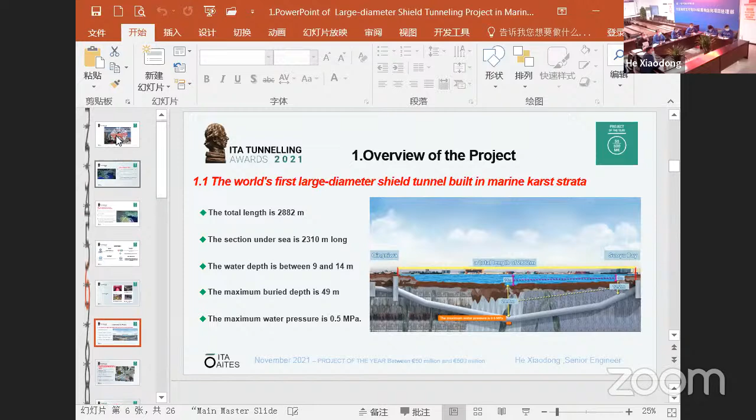I do not have the slides on screen. We cannot see your screen. Done. No, that's better, yes, I can see it now. Could you start again? Okay, I'll start again. Can you put it in full screen, please? Can you see our slide now? Yeah, let's go like this.

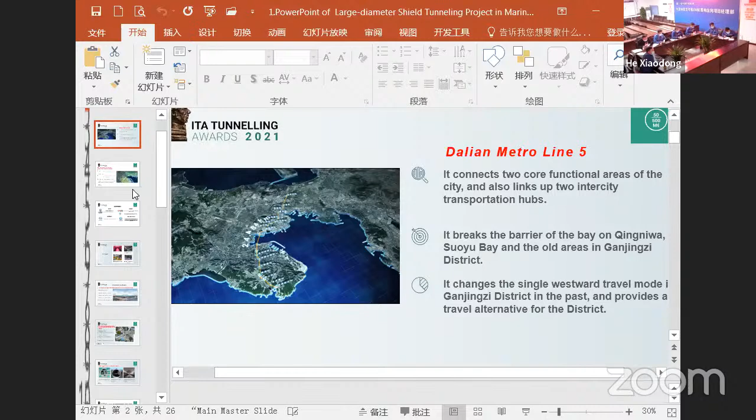Our project is the largest diameter shield tunneling project in karst strata of sea area. The project is located in Dalian, Liaoning Province, China. It is the control project of Dalian Metro Line 5, which breaks the traffic restrictions due to the bay and solves the problems of a single westward travel mode in Dalian City.

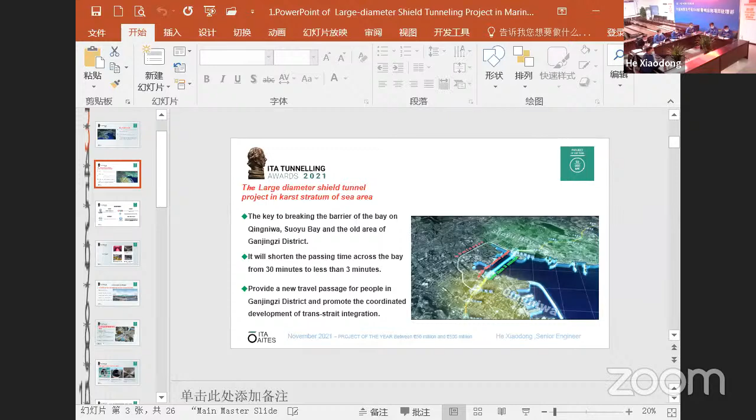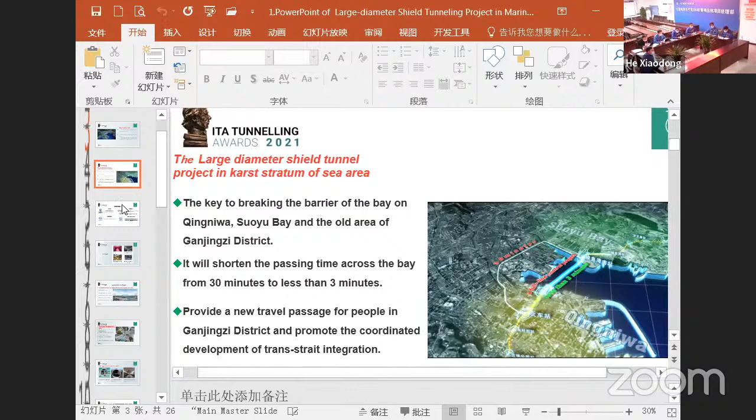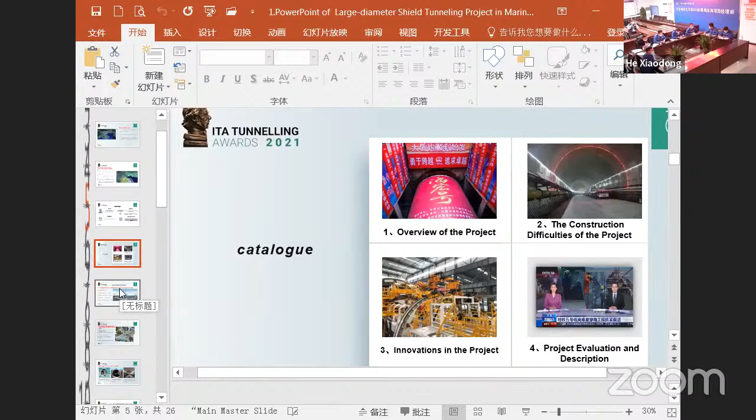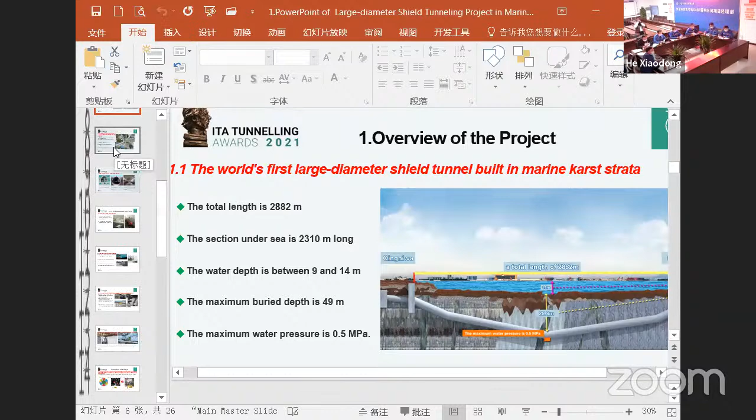We have done a lot of research on the design and development of shield tunneling machines, karst detection, treatment, and submarine excavation technology of large diameter shields. By now, we have come out with a number of innovations. The tunnel has a total length of 2882 meters and adopts a single hole, double line, double layer lining structure. It is the largest undersea subway tunnel in China.

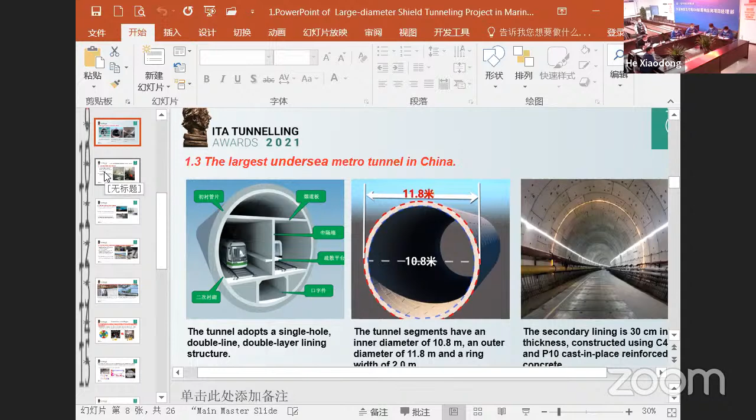The tunnel segments have an inner diameter of 10.8 meters, an outer diameter of 11.8 meters, and a ring width of 2.0 meters. The secondary lining is 30 centimeters in thickness. The section under the sea is 2310 meters long. The water depth is between 9 and 14 meters. The maximum buried depth is 49 meters, and the maximum water pressure is 0.5 megapascals.

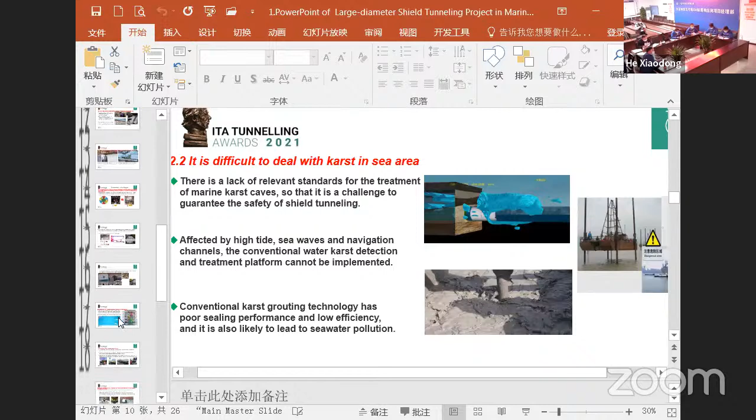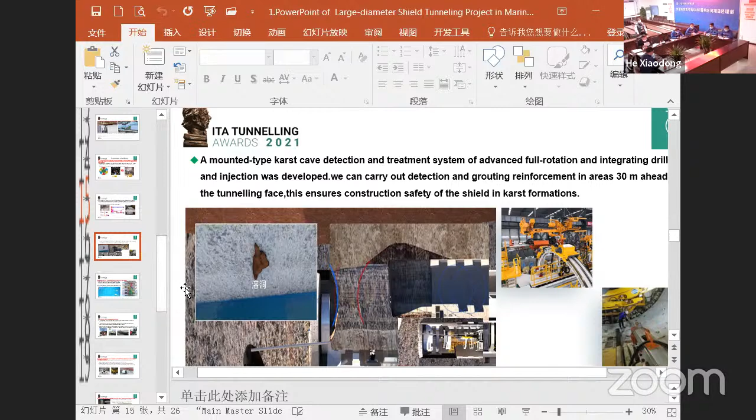The tunnel goes through a 1538-meter long, highly developed karst area with 3 major karst cave groups covering over 1,000 karst caves of various sizes, with a maximum cave height of 29.8 meters and the highest compressive strength of 118.2 megapascals.

We completed the following innovations in the project. First, we developed cutter heads for which the tool can be replaced under normal pressure for high water pressure karst formations.

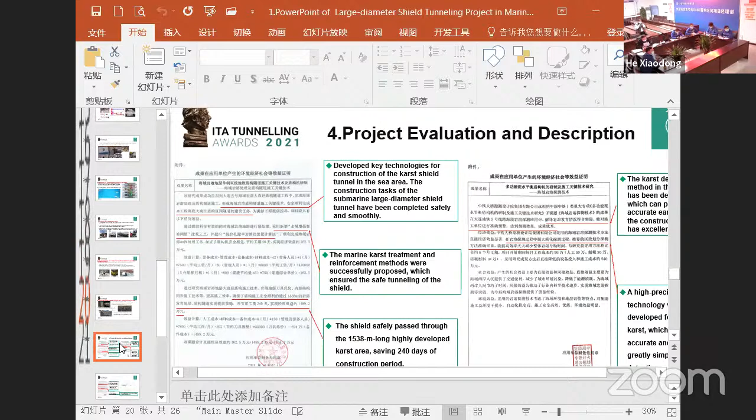The cutter heads can be inspected and replaced under normal pressure, which avoids the risk of tool replacement under high pressure and ensures the safety of life.

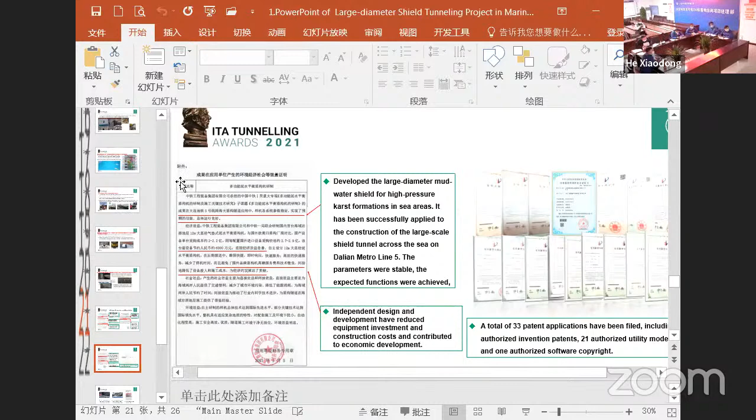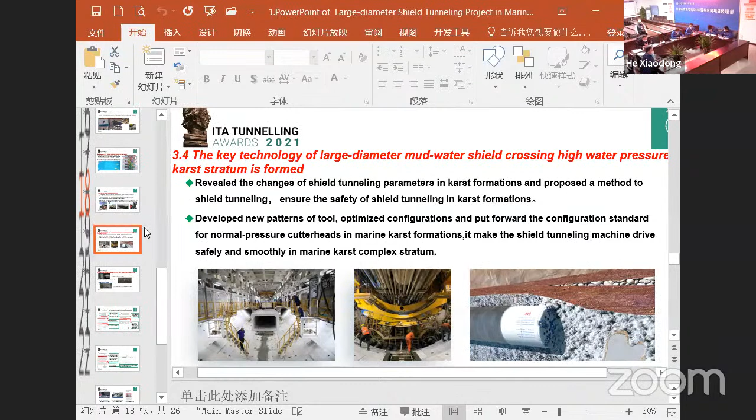A mounted type karst cave detection and treatment system of advanced full rotation, integrating drilling and injection, was developed. With this system, we can carry out detection and grouting reinforcement in areas 30 meters ahead of the tunneling face, ensuring construction safety of the shield in karst formations.

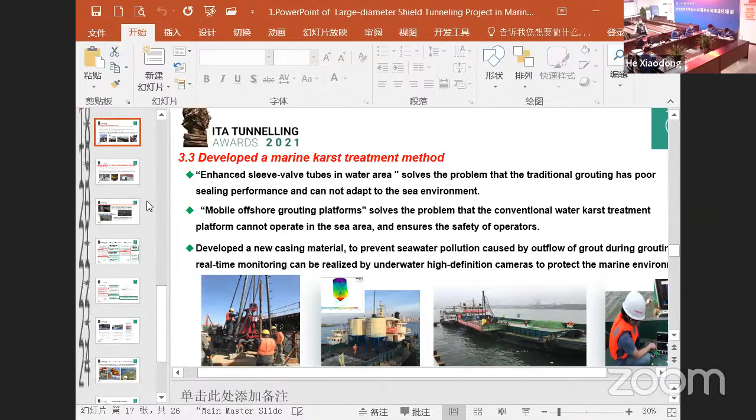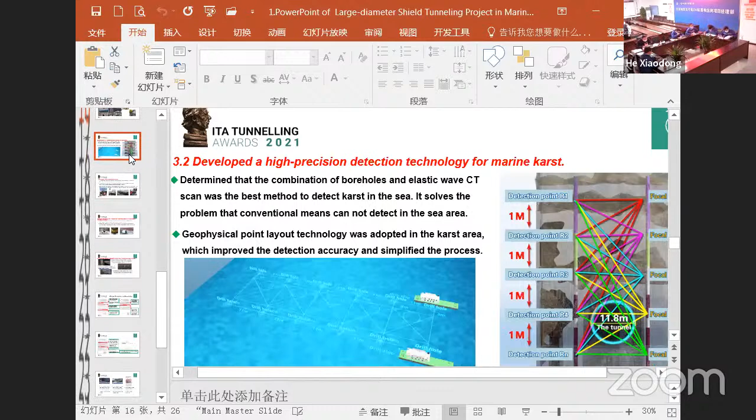Secondly, we determined that the combination of borehole and elastic wave CT scans was the best method to detect karst in the sea, which solves the problem that conventional exploration methods cannot be implemented in the sea area, and establishes the geophysical point layout technology in the karst area, which improves detection accuracy and simplifies the process.

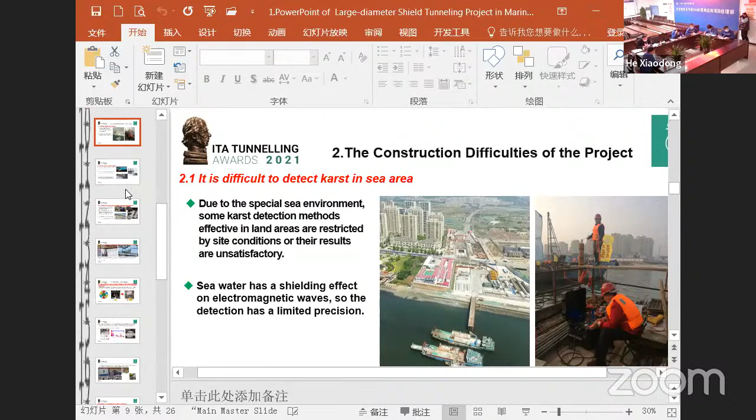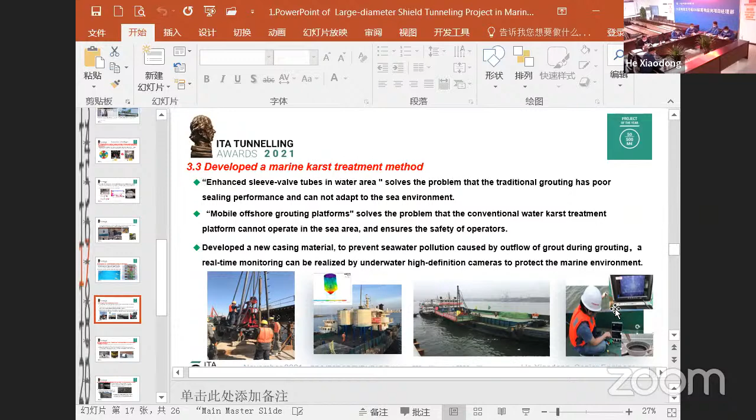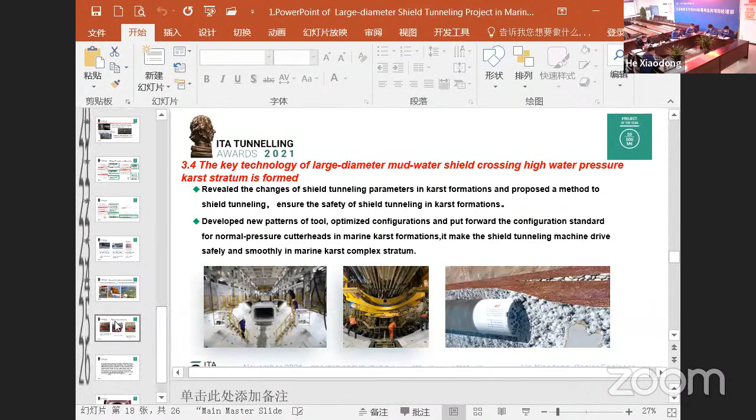Fourth, the key construction technology of large diameter mud water shield crossing the high water pressure karst stratum in the sea area is formed, which solves the various difficulties of large diameter shield tunneling in the karst stratum in the sea area, provides reference for shield crossing karst strata at home and abroad, and expands the stratum adaptation range of shield tunneling in the sea area.

Over the past 4 years, CCTV, People's Daily, Science and Technology Daily, Xinhua News Agency, China News Service, Liaoning Satellite TV, and other news media have reported more than 40 times that the project has conquered this worldwide difficult problem in super sea crossing construction, with news and documentaries fully affirming the construction achievements of the large diameter shield tunnel project in karst stratum in the sea.

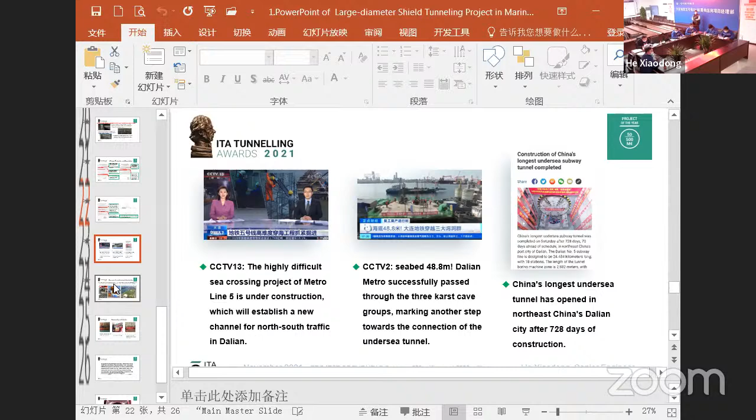The shield machine passed through 1538 meters of karst strong development area safely and smoothly, with no safety accidents occurring in the construction process. To protect the surrounding marine environment, a 5,000 square meter mud water site was established, which can screen and classify the slag excavated by the shield.

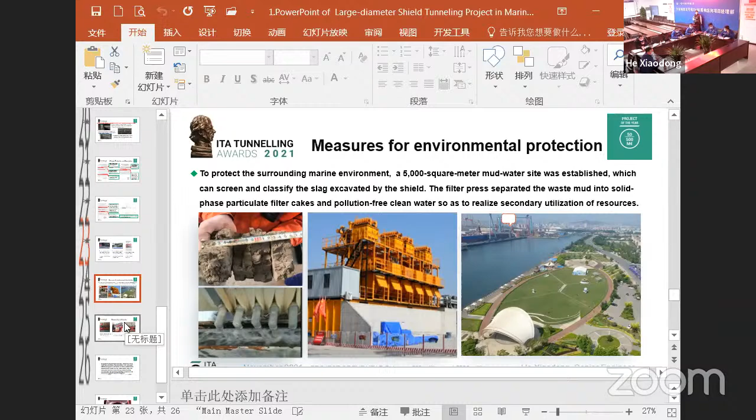The filter press separated the waste mud into solid phase particulate filter cake and pollution-free clean water, so as to realize secondary utilization of the resources.

Since the beginning of construction, the project site has been used as one of the venues for Dalian Nature's open day to citizens. We have established good social relationships through public visits, joint public welfare activities, and volunteer services. The project construction has won the support of residents of the surrounding communities, who speak highly of the super sea crossing project. Thank you for your attention.

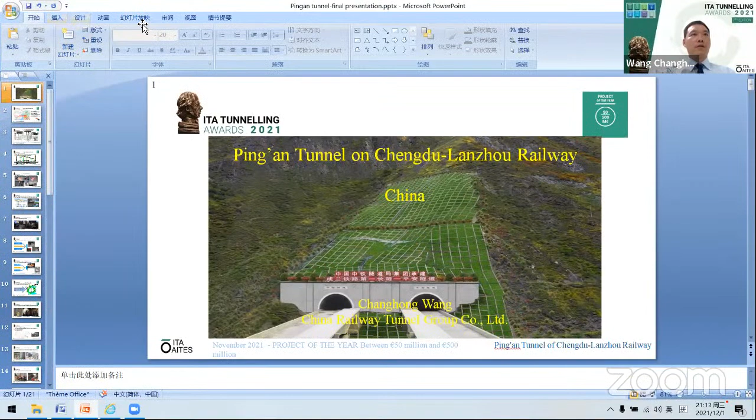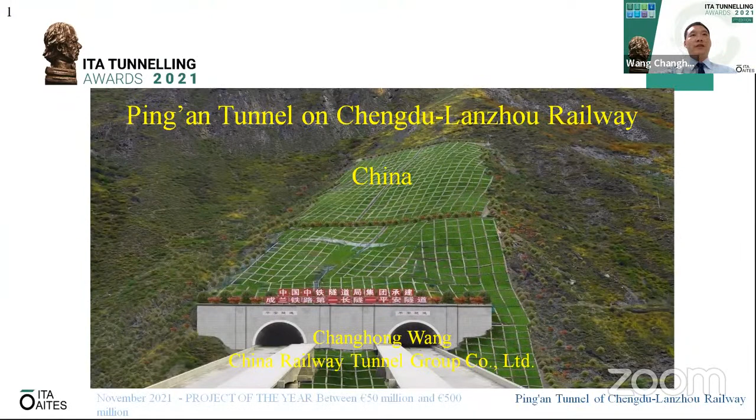Today, my presentation is on the Ping'an Tunnel on the Chengdu-Lanzhou Railway. The railway starts from Chengdu, Sichuan, and ends in Lanzhou, Gansu. The total length of the railway is 727 kilometers, with a design speed of 200 kilometers per hour.

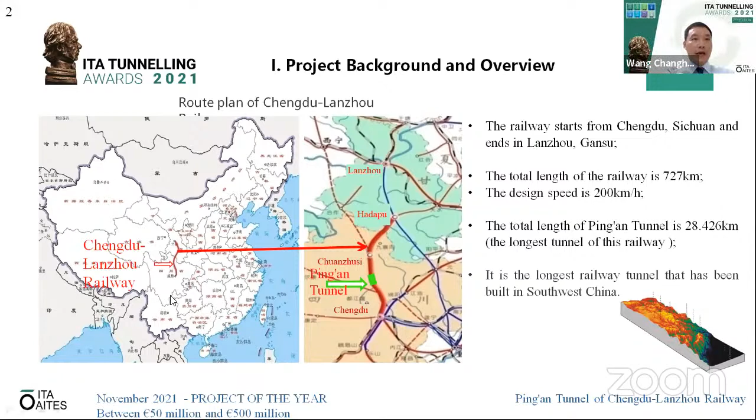The total length of Ping'an Tunnel is more than 28 kilometers. It is the longest railway tunnel that has been built in the southwest of China.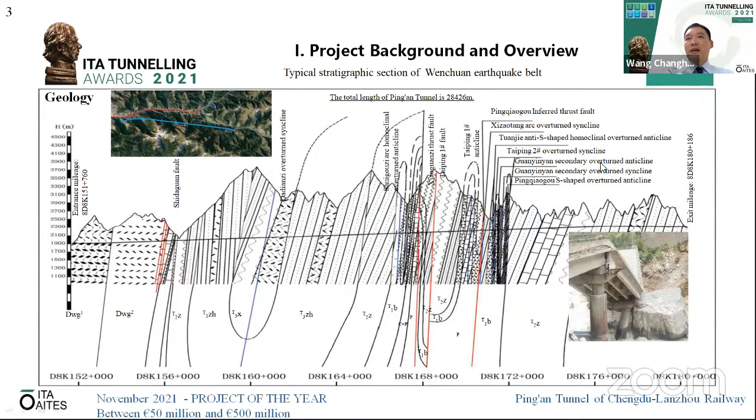Let's look at the longitudinal section of the geology. Ping'an Tunnel is located in the typical stratigraphic section of the Wenchuan earthquake belt. There are so many faults, synclines, and overturned anticlines. The geology is very complicated.

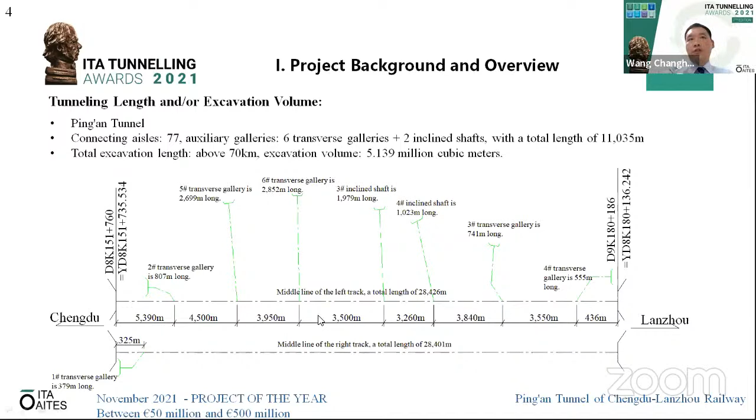For the purpose of accelerating the speed of construction, we built connecting aisles 77, 6 transverse galleries, and 2 inclined shafts. The total excavation length reaches more than 70 kilometers.

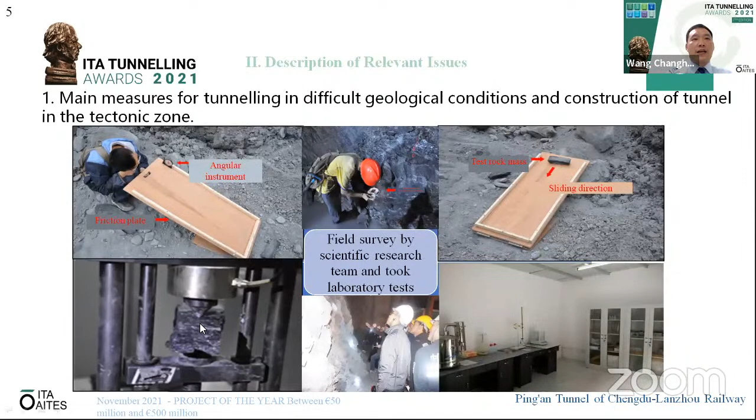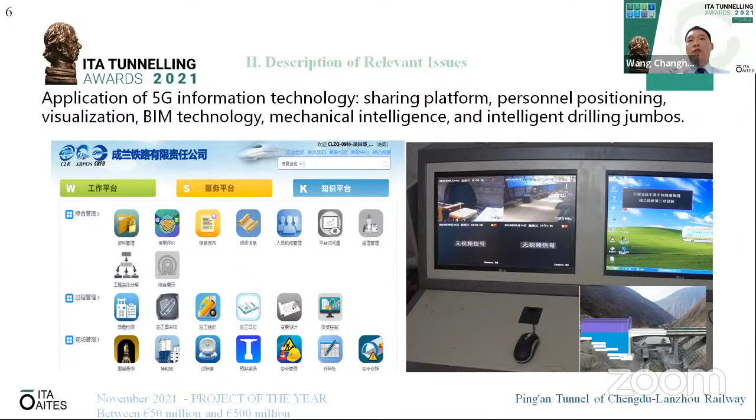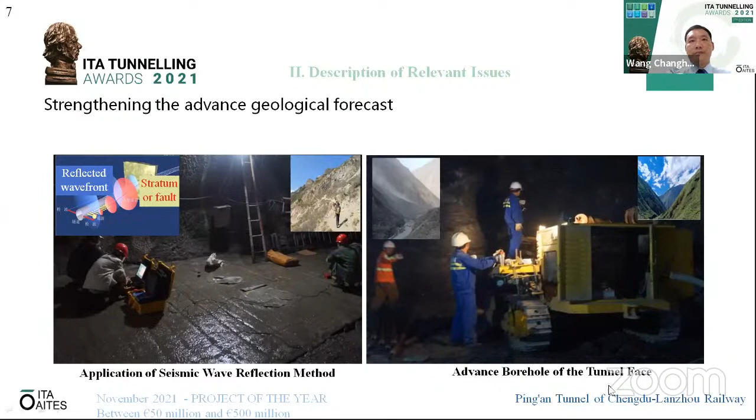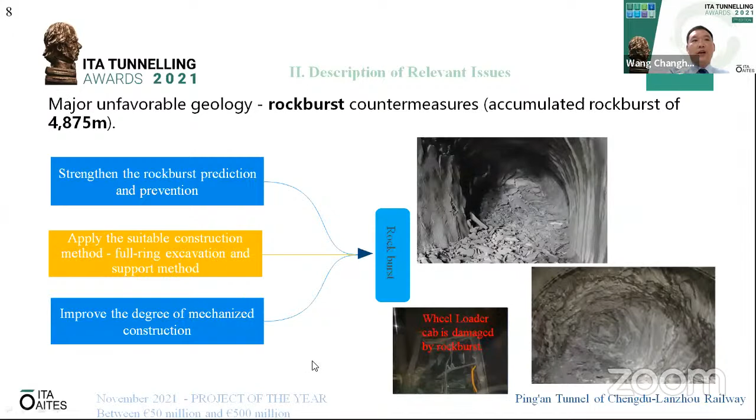There is major unfavorable geology, the rock burst, where the wheel loader cab is damaged. For countermeasures, we may strengthen the rock burst prediction and apply a suitable construction method, the full ring excavation, and improve the degree of mechanized construction.

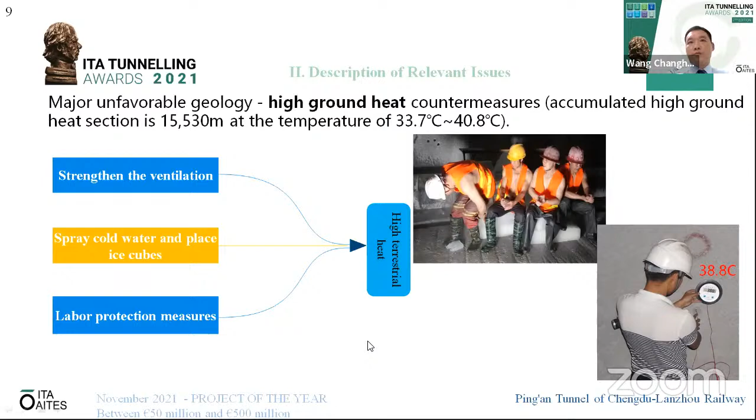There is another unfavorable geology, high ground heat. The countermeasures: we may strengthen the ventilation. For example, when the temperature reaches 38 degrees, we spray cold water and place ice cubes, along with other labor protection measures.

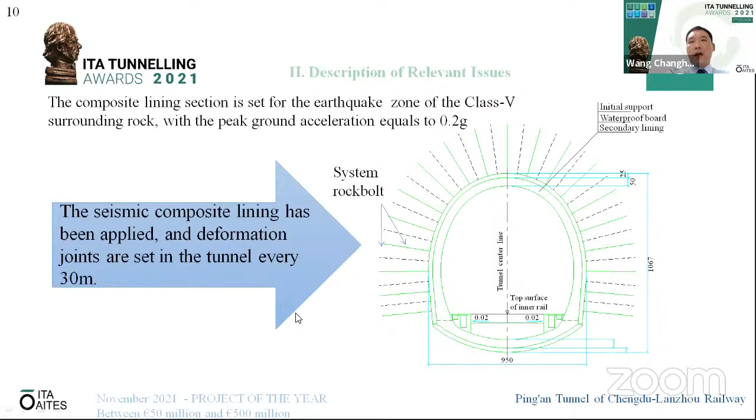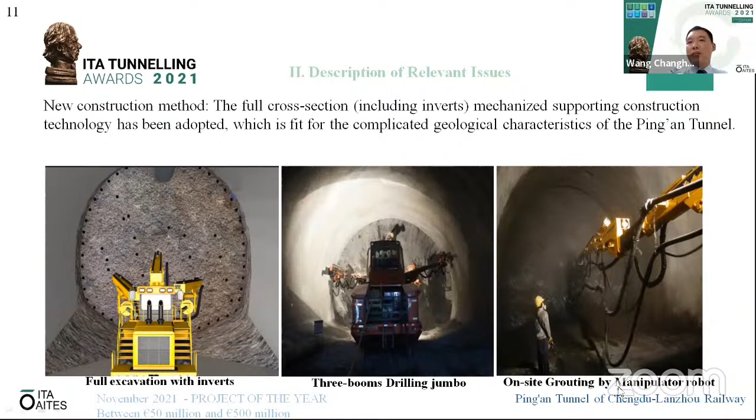The seismic composite lining has been adopted in the earthquake zone of class 5 surrounding rock. Deformation joints are set in the tunnel every 30 meters. The full cross-section inverts mechanized supporting construction technology has been used, for example the 3-boom drilling jumbo and on-site grouting by manipulator robots.

Based on this work, we obtained several patents for utility models and inventions, for example the rock bolting jumbo for shotcrete and rock bolt support.

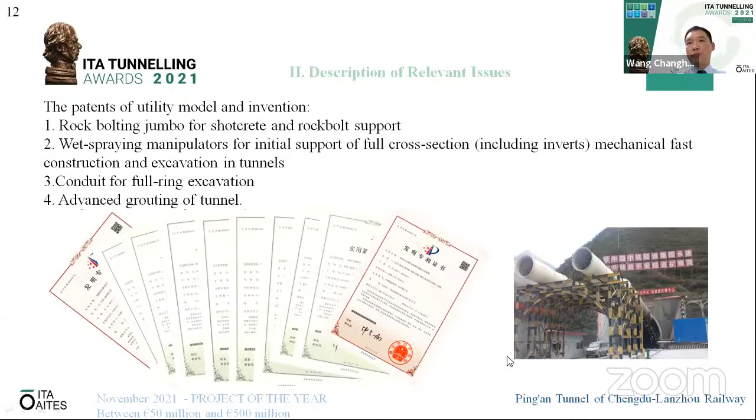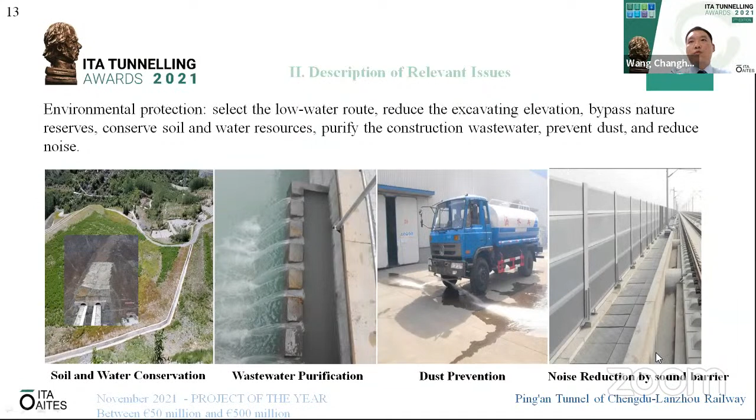For environmental protection, at first we selected the low water route, reduced the excavation elevation, bypassed the nature reserves, conserved soil and water resources, purified the water, prevented dust, and reduced noise with sound barriers.

Second, the logistic support for the construction of the super long tunnel. Emergency medicine and cold drinks in the tunnel were provided. The project emergency warehouse provides extinguishers, life belts, and emergency tools.

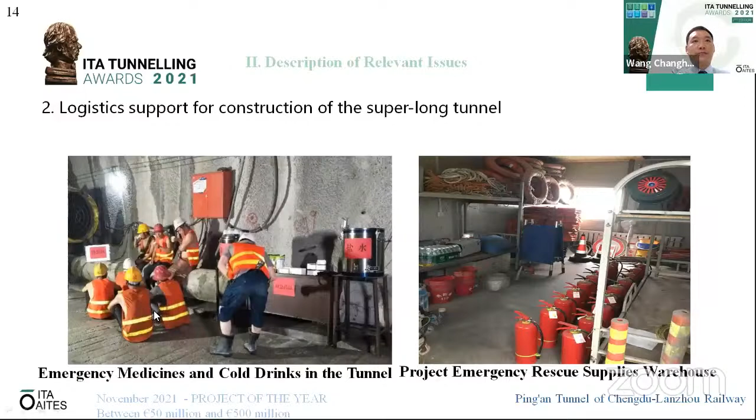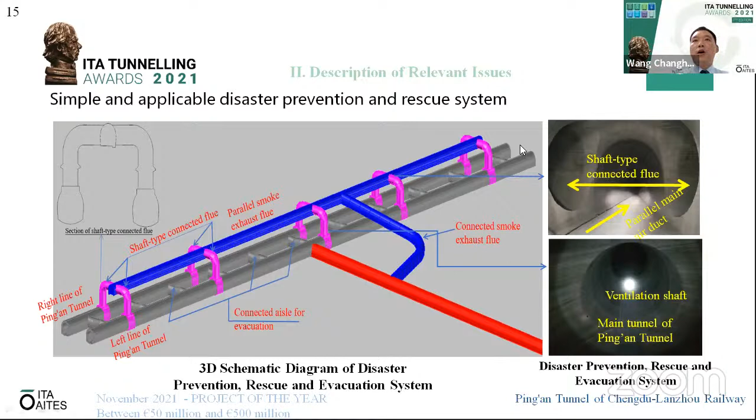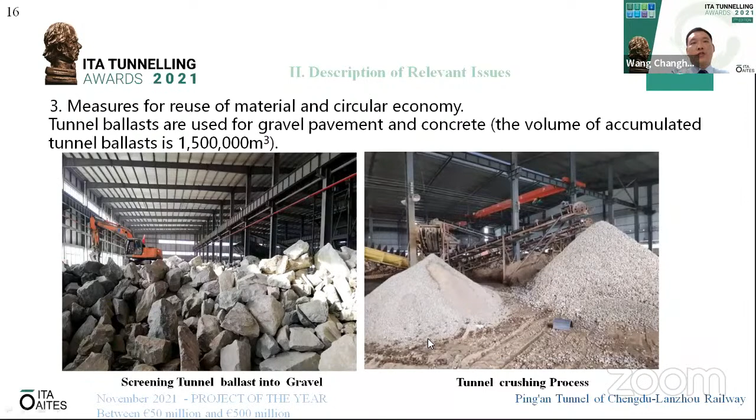For reuse of material, the tunneling ballast is used for gravel pavement and concrete. There is a screening and crushing process during construction. More than 470,000 cubic meters of tunnel ballast were used for the subgrade and low-lying land filling.

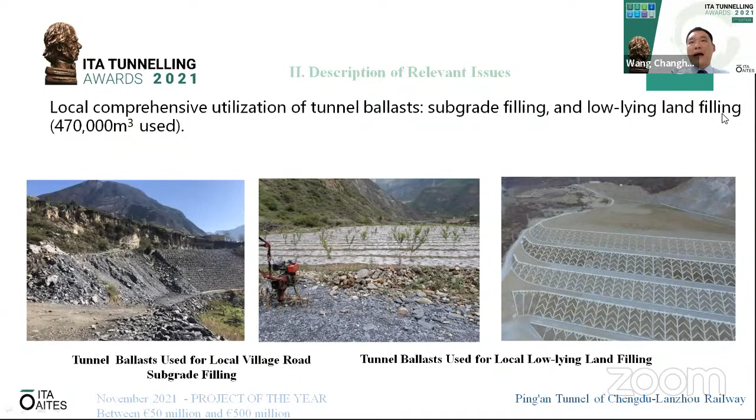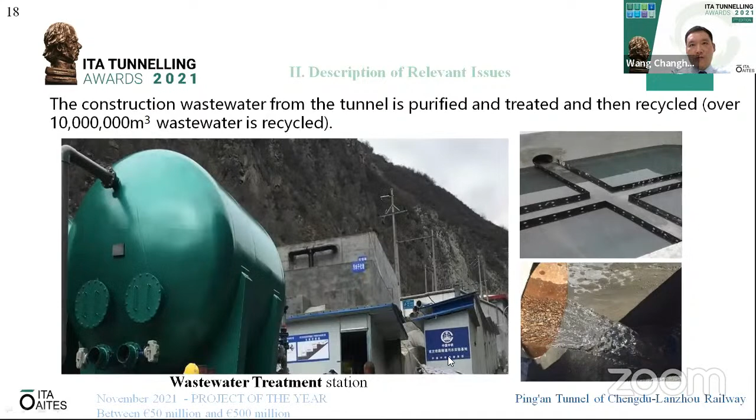The construction wastewater from the tunnel, reaching 10 million cubic meters, was recycled. Fuel oil equipment was replaced by electric energy equipment, for example the jumbo. Solar energy is used for the offices and living quarters.

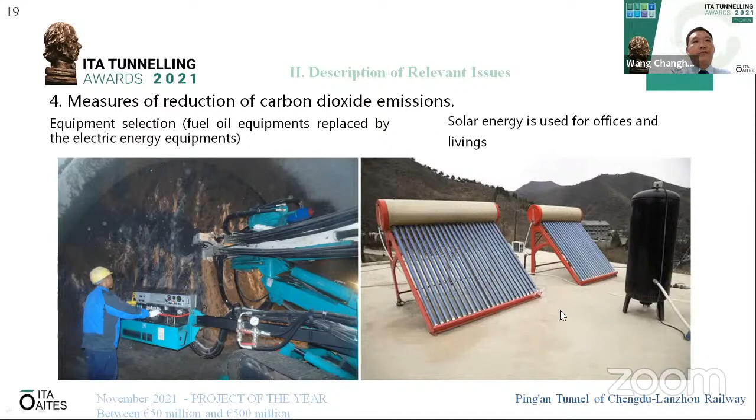Finally, I want to make a conclusion. The deeply buried, super-long tunnel under high earthquake intensity, rock burst, and high temperature conditions has been built. The disaster prevention and rescue system achieved the goal of shortening construction time by 20 months. For the future, there are more goals to be achieved for railway construction, to enable worldwide high-speed trains that are intelligent, green, environment-friendly, and energy-saving.

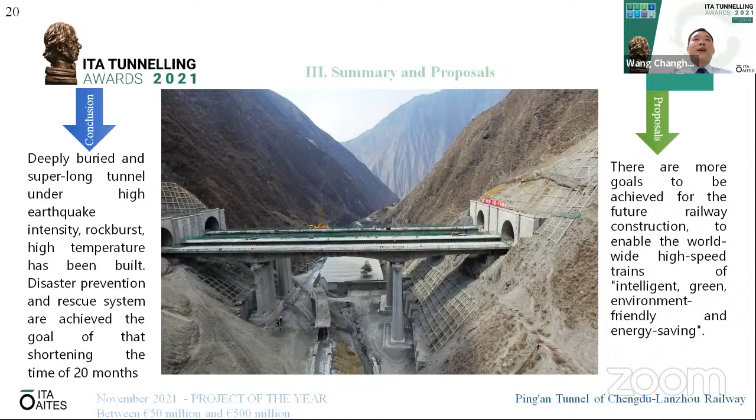Thanks, and that's all. Thanks for your listening and watching.

Thank you very much, Wang, for this very interesting presentation of a long and difficult tunnel. We'll come afterwards with probably questions. Let's go now to Paris with a presentation by Francis Lanquette about the south extension of Metro Line 14.

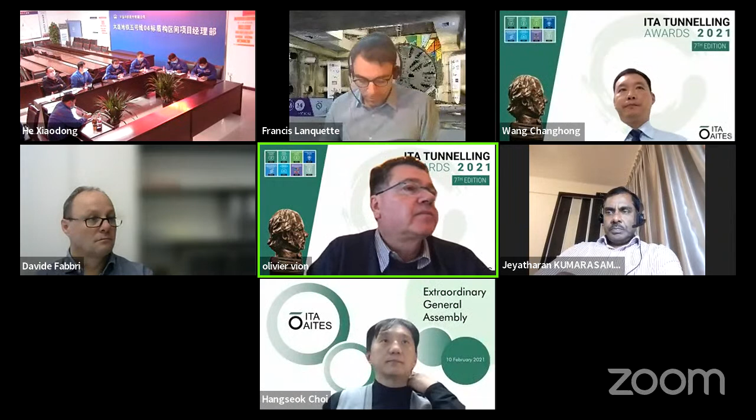Okay, so let me share my screen. Is it okay? Yes, it is. Okay, so I start. Let's start from the beginning, it will be better.

So I am Francis Lanquette. I work at Setec, which is one of the biggest engineering companies in France, and I will present the south extension of Metro Line 14 in Paris, in particular the GC02 contract.

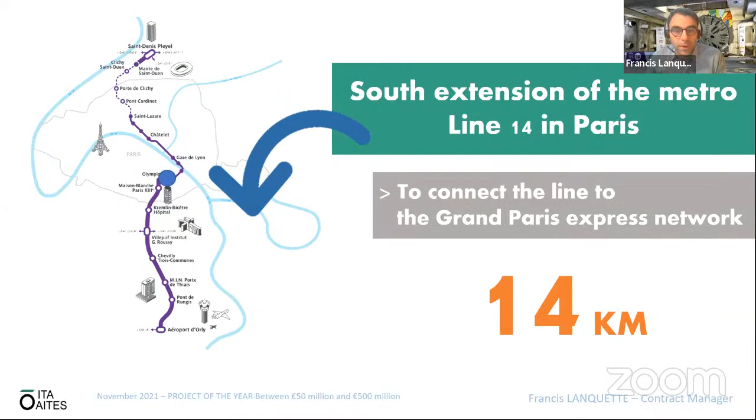A brief presentation of the project: Line 14 in Paris is 14 kilometers long, and it will connect the existing Line 14 to the Grand Paris Express network. It will serve 7 new stations, but we can say that one of the most important stations will be the Orly Airport station, which will allow linking the center of Paris to Orly Airport in only 23 minutes.

I don't know if some of you have been to Paris by airplane, but today it's quite complicated to join the center of Paris from the airports, so it will be much faster in the future. The main objective is to open the line for the Olympic Games in 2024.

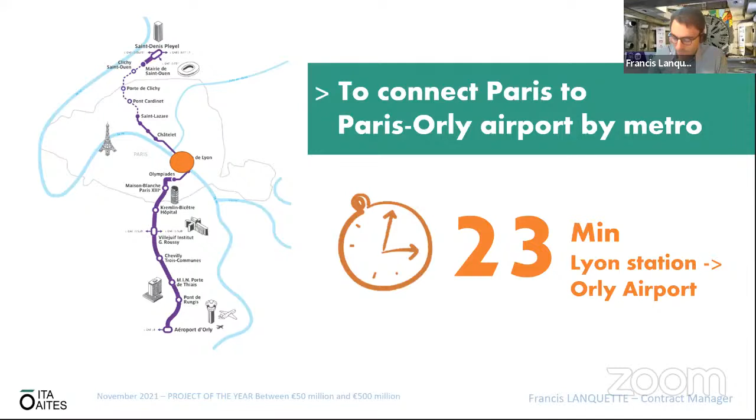The client is Société du Grand Paris, which has delegated the operation to RATP, the historical client for the metros in Paris. The project manager, which I belong to, is the Elios joint venture, constituted of Setec and Systra, two engineering companies in France. The construction group is the Vinci and Spie Batignolles joint venture, led by Dodin Campenon Bernard.

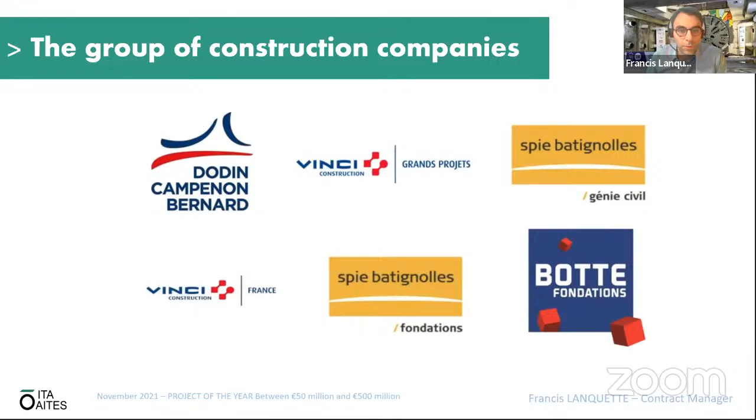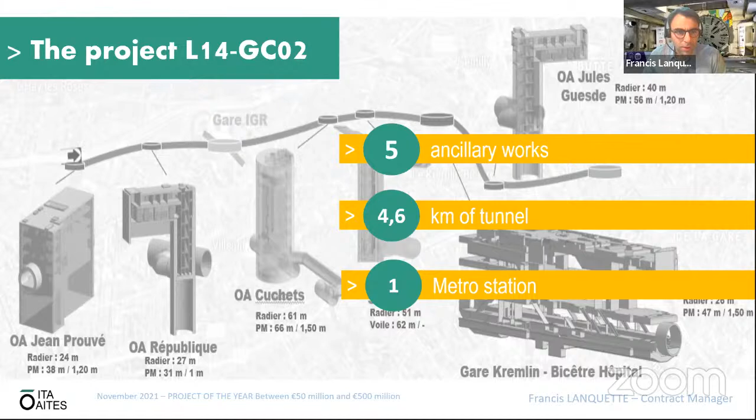To describe the global project, there are 5 ancillary works in order to ventilate the tunnel and allow safety exits, a 4.6 kilometer tunnel, and 1 metro station in this GC02 contract.

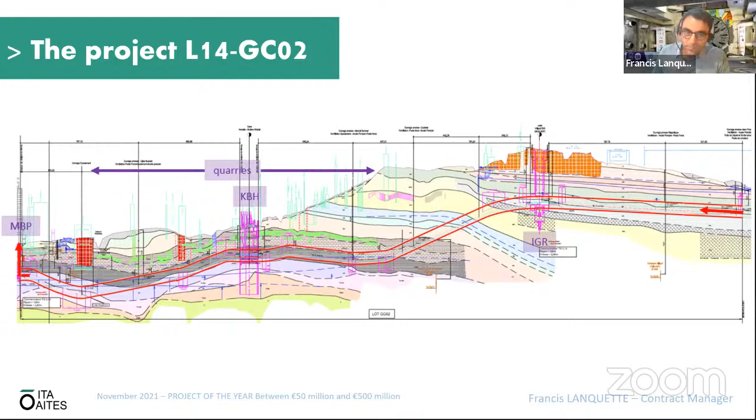To sum up the project, the overall construction delay is 42 months. One important point is that we are still on time to open the line for the Olympic Games, so for the moment we are quite relieved.

Dealing with the cost of the project, the amount is 406 million euros at the end of the construction for the civil works. At the peak of activity, 500 workers were involved in the works.

After this general presentation, we can focus on some particular points of the project. First, the launching shaft, named Jean Prouvé. Just to mention that at the beginning, the contractor decided to replace the steel struts and concrete beams with active ground anchors, to simplify the handling operations, and the TBM installation is in the shaft. It was quite a good idea that they had.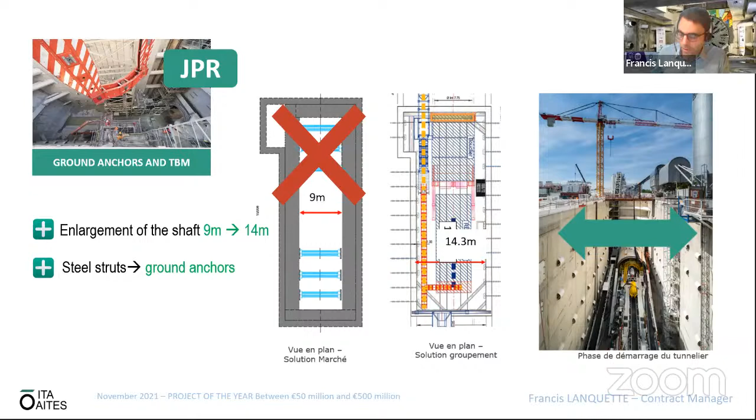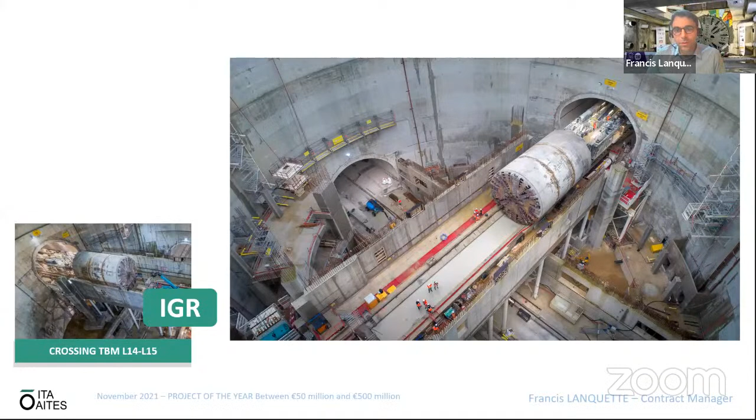Now we will focus on the Institut Gustave Roussy station. This interface was a very difficult point. The tunnel has to cross line 15, which is also under construction, at the station, which is constituted by a big shaft of 60-meter diameter and 4 caverns. The line 14 TBM had to cross the shaft on the concrete bridge, 10 meters above the invert of the station. Here you have the plan view of the station and a longitudinal cross section.

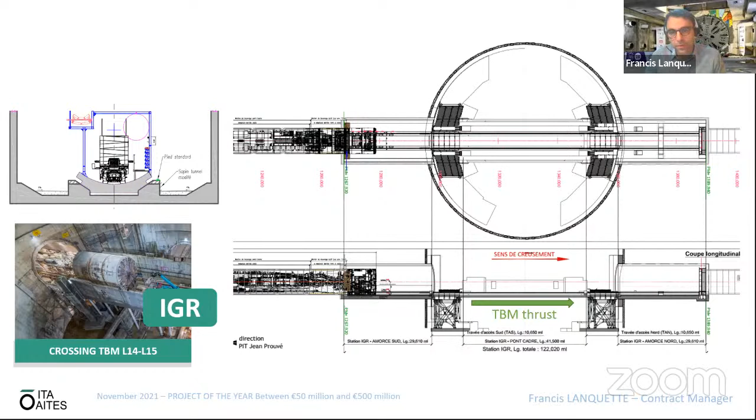We can mention that the bridge was also used to transfer the thrust of the TBM from the northern cavern to the southern caverns. This thrust was transmitted by big struts in steel, which you can see in red on these pictures.

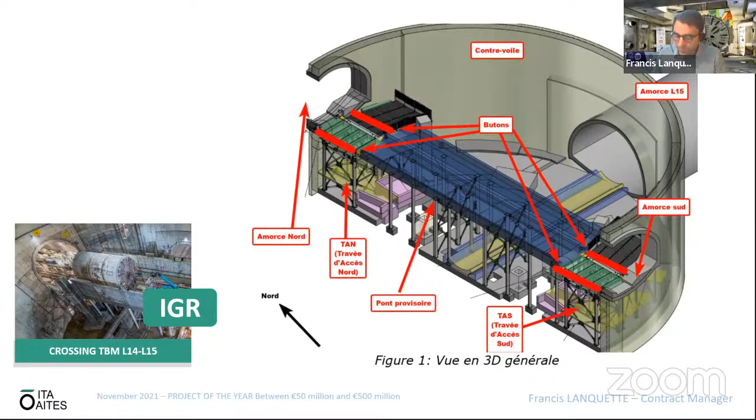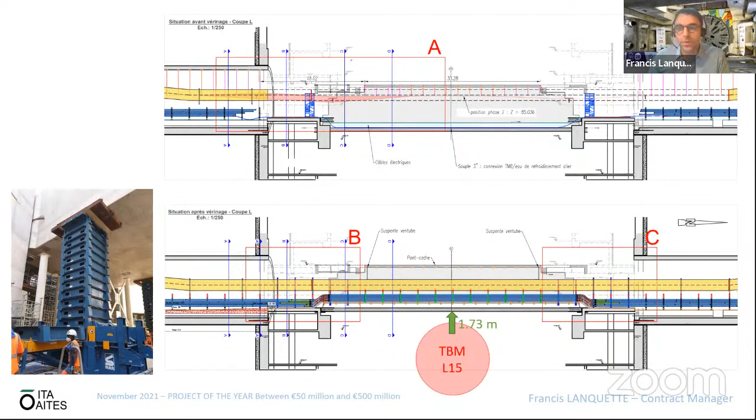After that, we also had to lift up the bridge in order to allow the line 15 TBM to pass under it. You can see on the left a picture of the jacking operation, which allowed us to lift the bridge about 1.7 meters. This operation interrupted the line 15 TBM for some weeks.

Then, one important point I mentioned before is the excavation under the limestone quarries. You can see some pictures of these quarries. Basically, the quarries are constituted of galleries about 1 meter high, partially filled with excavation material. You can see on the right a map done by the Inspection Générale des Carrières during the construction of the quarries, beginning in the 17th century until the 19th century.

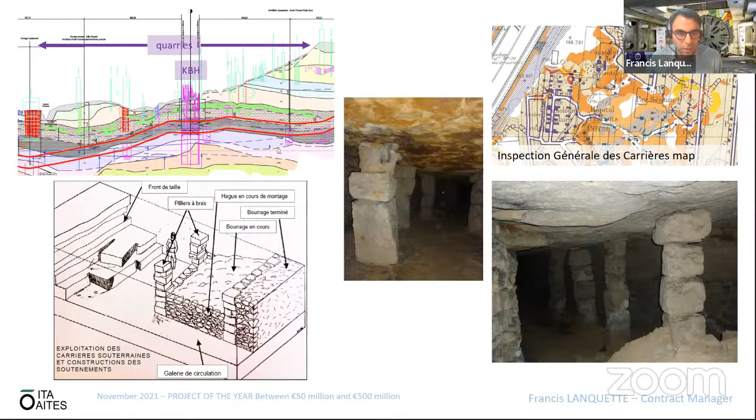So we decided to grout all the quarries in order to ensure the safety of the excavation under the city and under those caverns. Here you can see some pictures of the works. In total, to grout 1.6 kilometers of quarries over a width of about 20 to 30 meters, it took us 28 months, with the works subdivided into 14 zones.

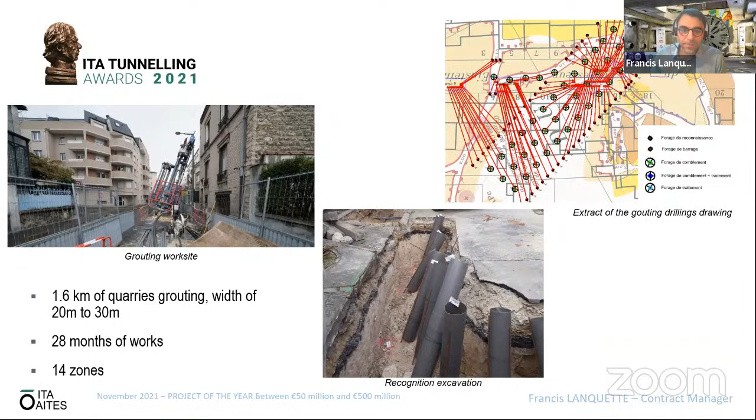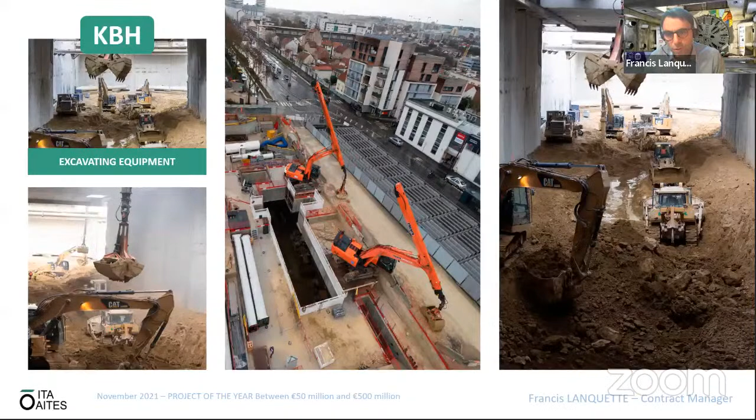The main objective was to have the work finished before the excavation by the TBM, which succeeded. Briefly, I can speak about the excavation of the Kremlin-Bicêtre Hospital station. Here the challenge was also to be ready to welcome the TBM on time, so the contractor used big mining engines to perform this operation in only 4 months.

Speaking about the tunnel itself, compacted gravel with recycled aggregates was used to build the tunnel invert. This allowed us to reduce CO2 emissions by 650 tons.

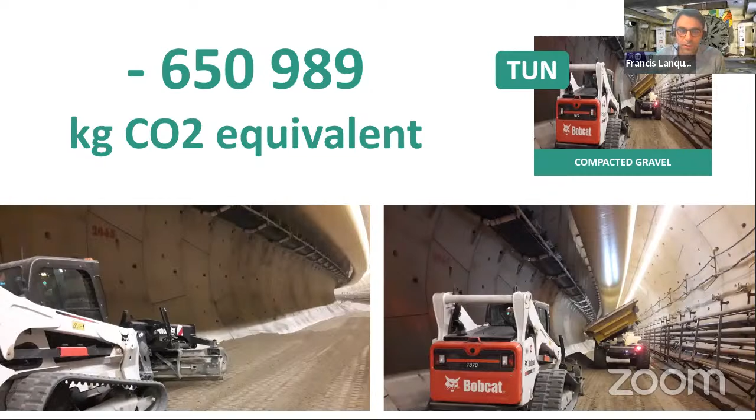To finish, one last challenge of these works was to dismantle the TBM in only 4 months in the south of Paris, at Maison Blanche station, which offered very little space to perform this complex operation. We managed to dismantle the TBM in a void only 10 meters long and 12 meters wide, and it took only 4 months in much constrained urban conditions.

That's all for my presentation. Thank you for your attention.

No, I don't see my Zoom picture, Zoom window. Stop. Okay, thank you very much.